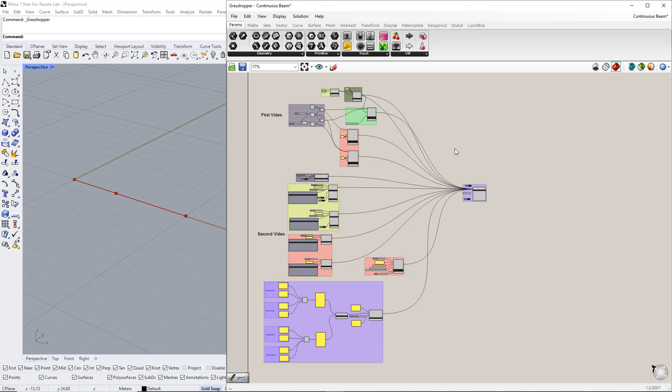Our first example will be about a continuous beam, divided into 2 videos. In the first video, we will create the geometry, members, cross-section and material, and assign supports. In the second video, we will create static analysis settings, load cases, design situations, and load combinations. Afterwards, we will apply the load on the members.

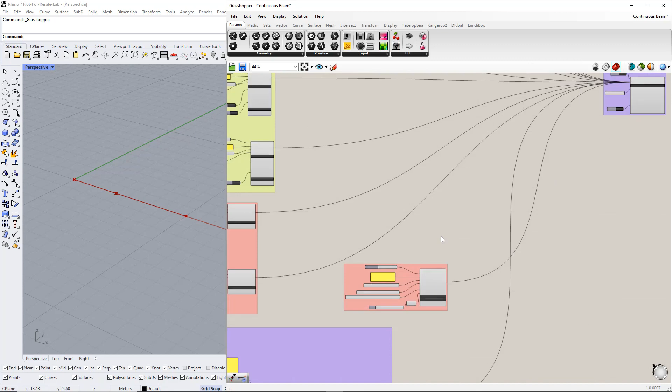In order to follow our online course, you need to install the Dlubal plugin for Rhino and Grasshopper. You can find it in the Dlubal folder under Tools.

Double-click on the file to run the installation. After completion of the process, start Rhino Grasshopper and RFEM.

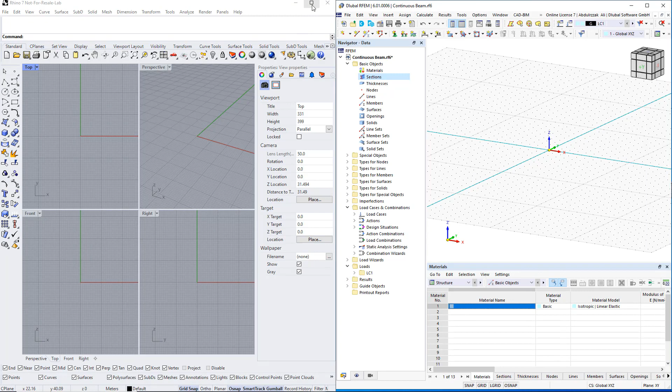First, we will show you some information about Rhino Grasshopper. When we start Rhino, we have 4 default viewports: top, front, right, and perspective view.

To rotate the perspective view, hold down the right mouse button. You can zoom in or out by scrolling. You can pan by holding down the mouse wheel.

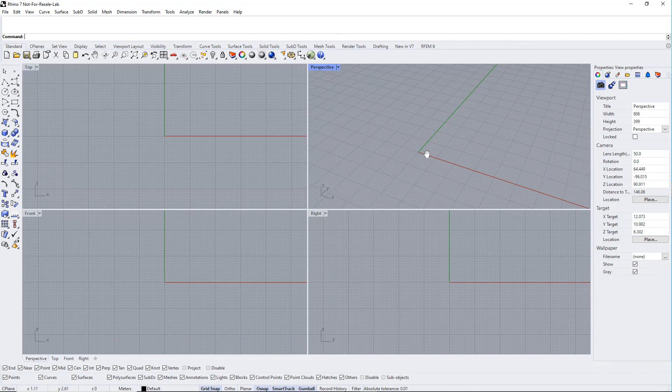For other views, you can pan by holding down the right mouse button. To minimize or maximize a viewport, double-click on the Name tab. You can also change the viewport from the Viewport tab here. You can change the display mode of a viewport, as well as many other settings, by clicking the Name tab, as you can see.

To launch Grasshopper, type Grasshopper into the Rhino command line or use the command Launch Grasshopper in the Standard tab in Rhino.

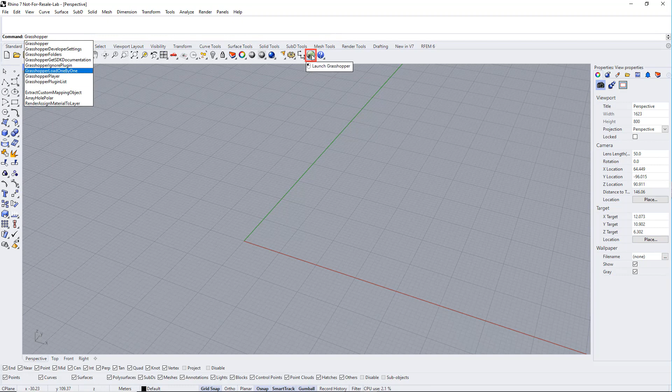The Grasshopper window will appear on the Rhino viewports. You can divide the screen into 2 parts by holding the Windows key and pressing the left or right arrow key. We will display more information and features during the course.

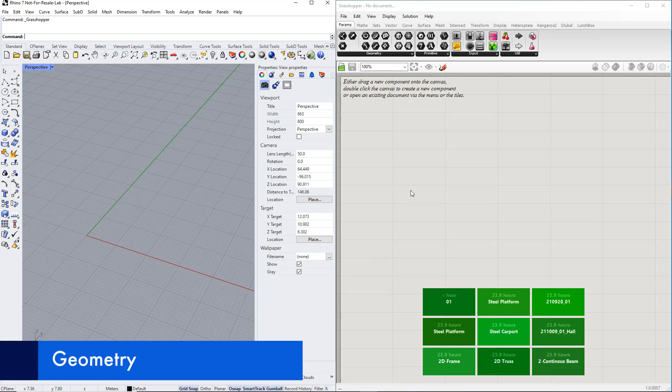Now we will begin with the geometry. First, we will create a point using the Construct Point component. You can find this component in the Vector tab. Then drag and drop it from the Vector tab onto the canvas.

You can also create a construct point by double-clicking the canvas and writing Construct Point. By default, the coordinates of the first point are 0, 0, 0. You can read any information in a component using the component Panel, which can be found in the Params tab, as you can see.

Afterwards, we will copy it twice using Ctrl+C and Ctrl+V, or by holding the Alt key and dragging the component.

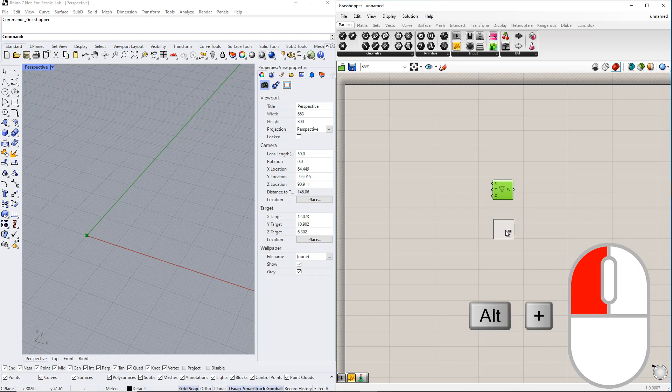For the second point, we will assign a number slider to the x-coordinate, so that it can be easily adjusted later with the slider. You can find it in the Params tab using drag and drop, or by double-clicking the canvas and writing number slider, as you can see.

For example, we will create a range by double-clicking the slider. The lower limit is 1 and the upper limit is 10. You can also enter the slider name. To do this, we enter first span, or set the rounding by selecting any type you want.

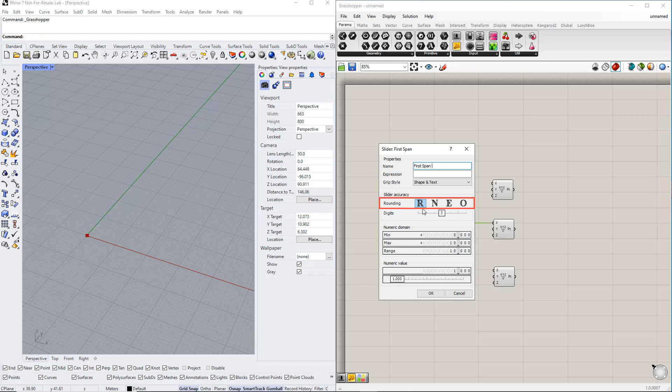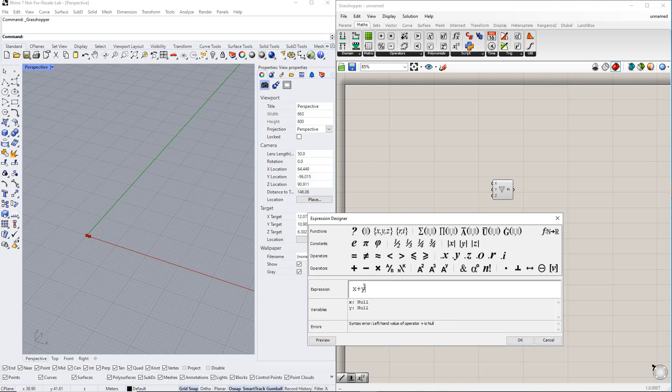For the third point, we will insert the expression component to define a parametric equation between the first and second spans. You can find this component in the Maths tab under Script. Double-click the expression component to open the expression designer and change the expression to x plus y, where x is the first span length and y is the second span length.

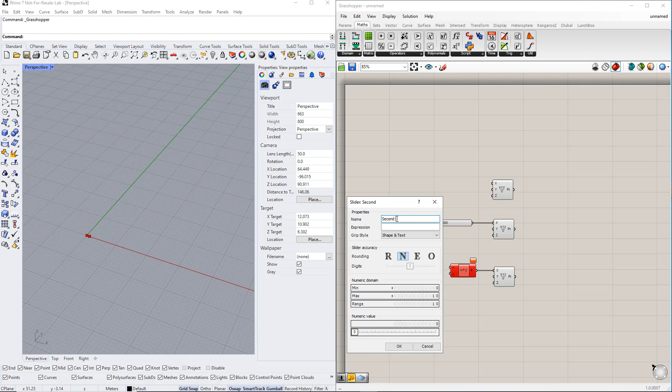You can create a range for y, either with a number slider command or by double-clicking the canvas and writing the lower limit, 0, then less than, and the upper limit. We enter 10 for the upper limit. You can click the plus sign to add an input or the minus sign to remove an input.

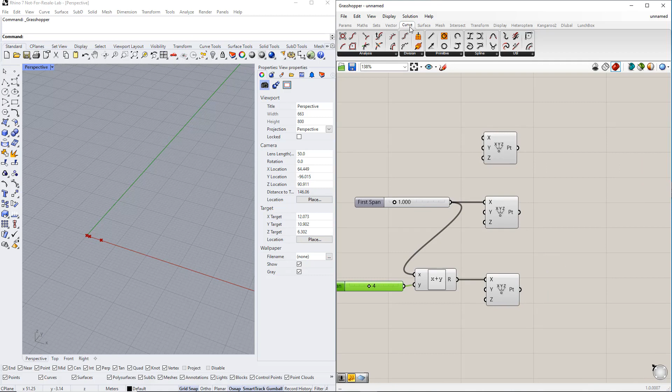Now we connect x and y to the expression component. In the next step, we will create lines between these points using the line component in the Curve tab. We use drag and drop, or we double-click on the canvas, write line, and select the respective line. In our example, we select the line which has a start and an end, as you can see.

Afterwards, we connect the start and end points of each line to the line component.

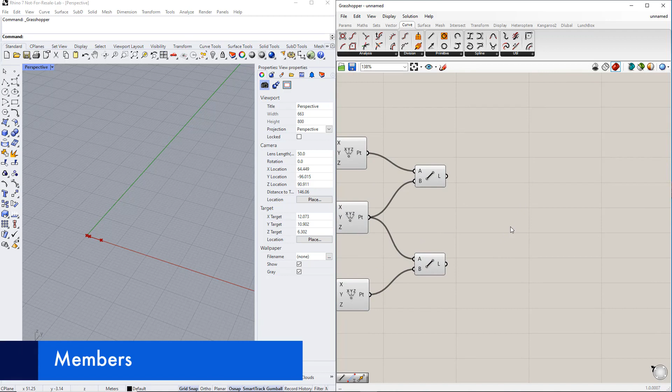To create a member for RFEM, we insert the Dlubal component titled Member. You can find it in the Dlubal tab.

Here, we can also define the member type using the valueList command with drag and drop, which is also in the Params tab. We can also double-click the canvas and write valueList. For this example, we select the beam type.

Now, we connect the line components to the grasshopper line in the member component. By default, a new connection will erase existing connections. Hold down the Shift key while dragging the connection wires to define multiple sources. The cursor will turn green to indicate the addition behavior.

You can disconnect wires by holding down Ctrl and dragging, or by right-clicking the connection and selecting Disconnect. As you can see, when we hover over an item, the wire will be highlighted in red.

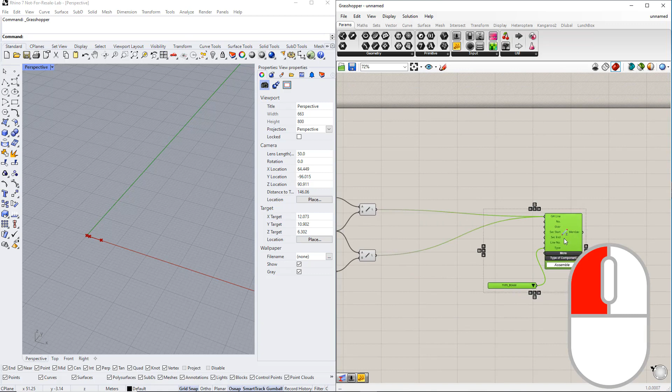Next, we will define a cross-section as well as material. For that, we will insert the Dlubal components, section, and material. You can also find them in the Dlubal tab. To enter the properties of the section and material, we use the panel command.

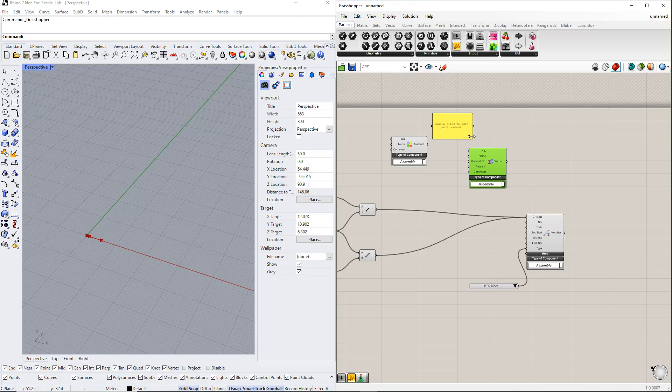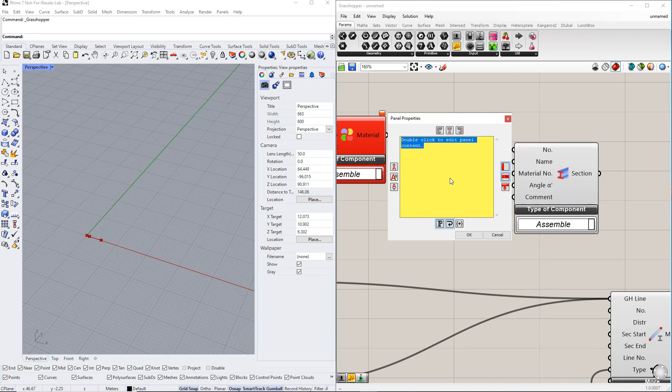Now we enter the numbers and names. For cross-section, we enter 1 as the section number and IPE 300 as the cross-section name. For material, we enter 1 as the material number and S235 as the material name.

Make sure that you use the correct RFEM terminology. Only then is it possible to export the elements correctly to RFEM.

Afterwards, we connect the material component to the material number in the section component and connect the section component to the section start in the member component.

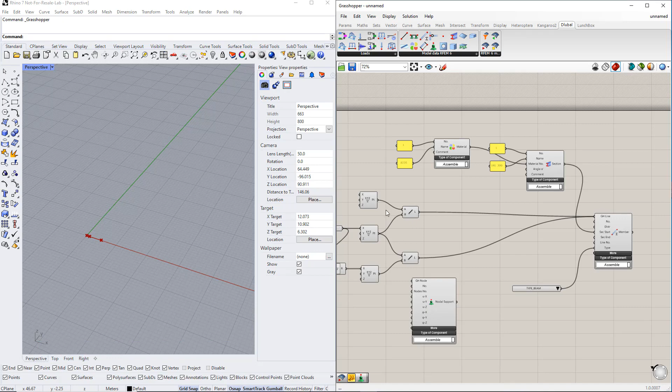In the next step, we want to define the supports. To do this, we insert the nodal support component, which is in the Dlubal tab. For the first node, we want to assign a hinge support. This can be defined by using the panel command.

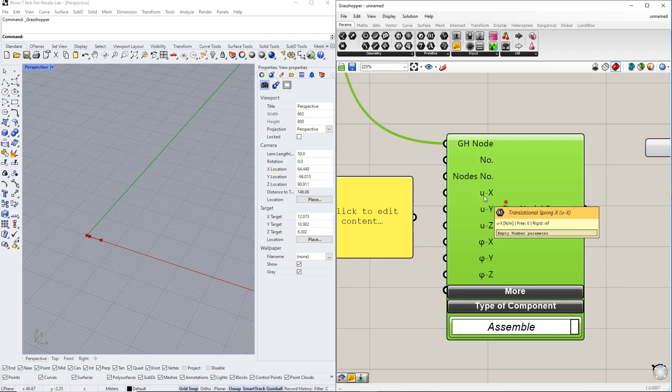As you can see, 0 means free, infinity (INF) means rigid, and every specific number in between means spring. Then, we connect this panel to the respective support conditions.

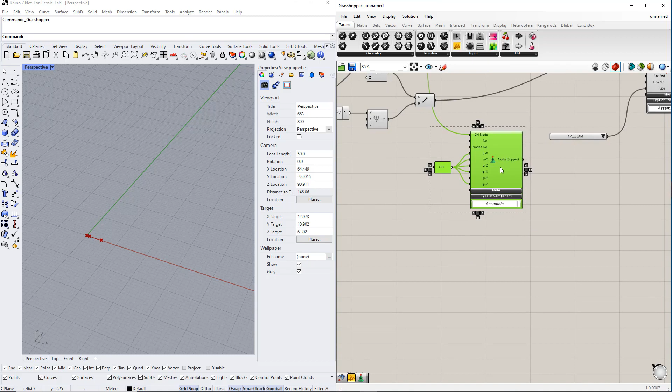We repeat the same procedure for the second and third supports, but with other conditions, because we want to define sliding supports.

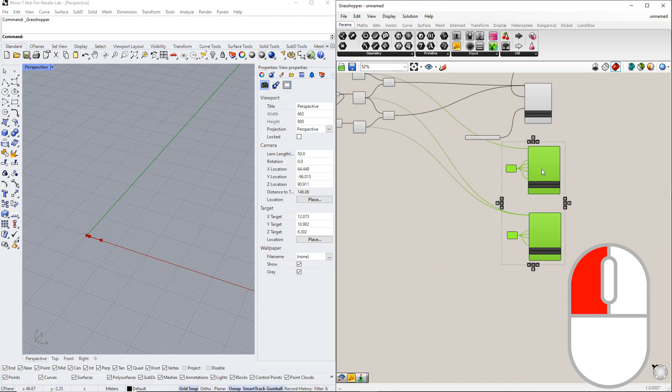To transfer this model data to RFEM, we have to insert the Dlubal component, RFEM6 export component.

We also have to activate Web Services, which is in the Options tab, in RFEM 6. Start the server automatically with the application.

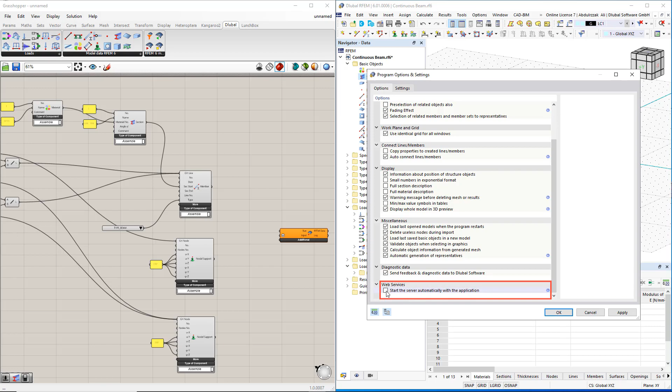To start the export, we use either the button or the Boolean toggle command in the Params tab. For this example, we want to use the Boolean toggle command.

We can also select units using the value list command. For this example, we select meters.

In addition, we can overwrite the previous data in RFEM using the Boolean toggle command. That means all data in RFEM will be deleted before the export, once we switch to true.

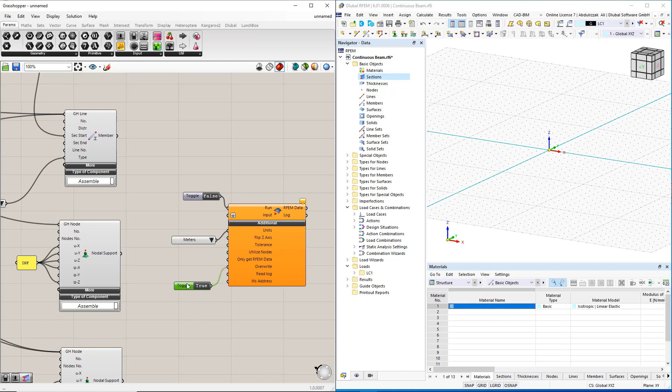To make the work easier, we will make groups, for example, a group for geometry, member, and so on. We can create a group by typing Ctrl+G with the desired component selected.

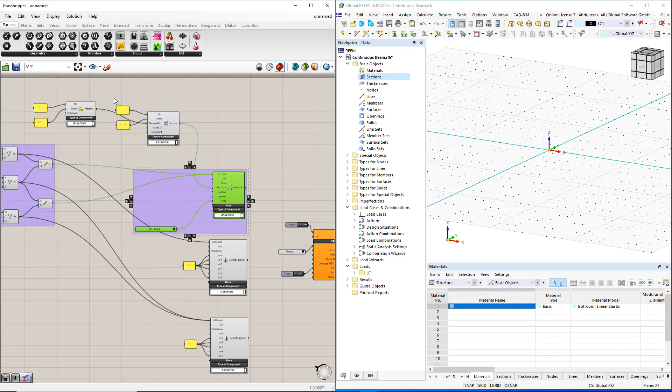To edit the name and appearance of the group, we right-click anywhere on the group. Here, we can enter the name of these groups, for example, geometry, supports, etc.

We can also change many options, such as outline type, add to group, remove from group, or change group color, as you can see.

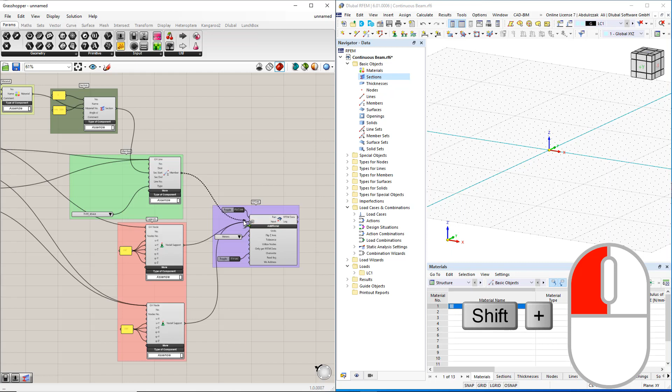After connecting all the components to the RFEM 6 component, we double-click the Boolean toggle command to perform the export.

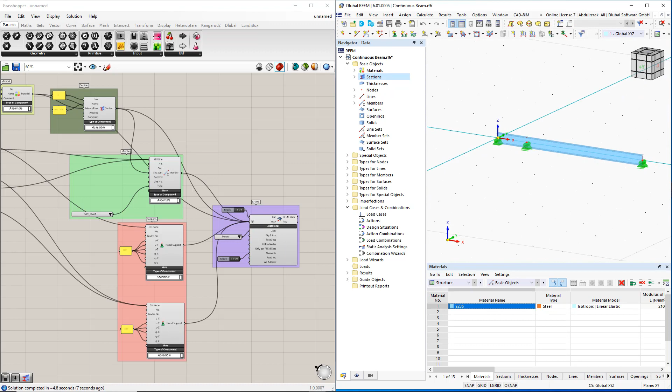All changes to the parameters in Grasshopper now have a direct impact on the RFEM model.

In the next video, we will learn how to create static analysis settings, load cases, design situations, and load combinations, and apply the load on members.